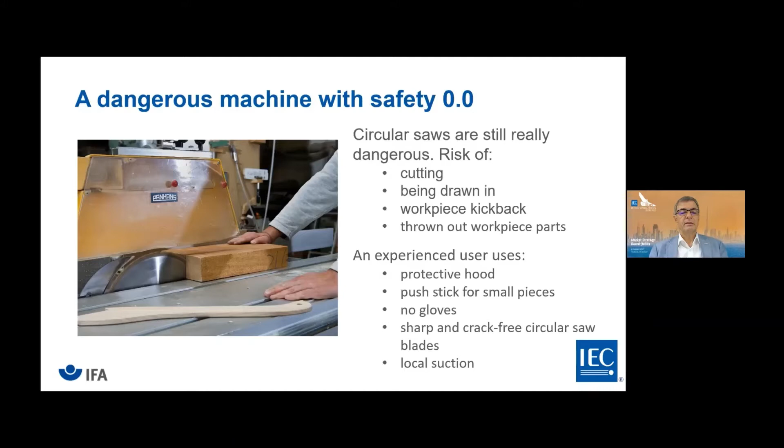And of course you can see in the picture a local suction. But it's clear this is a safety 0.0 situation. You have the hood, but more or less your fingers are very near to the blade, and unfortunately you have accidents with this machine. In the 1990s we had the first discussions with machines, machining centers.

We discussed there also the ISO new modes of operation, manual intervention we called it. The point was, when you open the door there, that is typically a safety 1.0 situation. Normally you work with closed doors, but when you open them for the setting mode, for manual intervention, when you program the system, for example, you have to measure, you have to introduce when the axes are moving.

The question was, is it possible to do it now as a kind of safety 2.0 for these manual intervention modes? So in the standards, we defined a safe stopping process, safe standstill, safe operational stop, safely reduced speed, and safely limited absolute position. So how was it possible to do that?

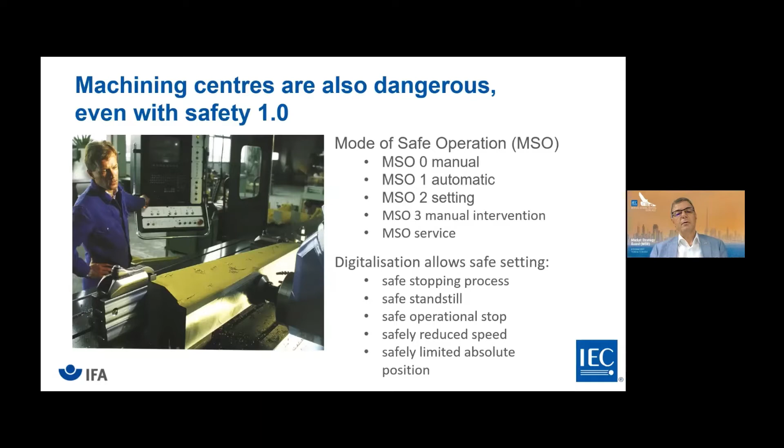Here we have a redundant situation because of functional redundancy. You have a programmable logic controller, and you have a power drive and also a numerical controller. What we did there, we used these different computers in the system for redundancy for safety. So we had the PLC and the numeric controller to have redundancy from the input signals for the doors and some other switches. We had to monitor the velocity using the numeric controller and the power drive, and to stop the system, we also used the numeric controller and the power drive in redundancy. So we have a redundant system.

As you can see here, this was possible because in the 90s we designed these new standards on functional safety. I was for about 10 years the head of the German delegation of the working group which produced the 61508 standard. So functional safety was one of my essential techniques we used in the 90s to make a machine safer.

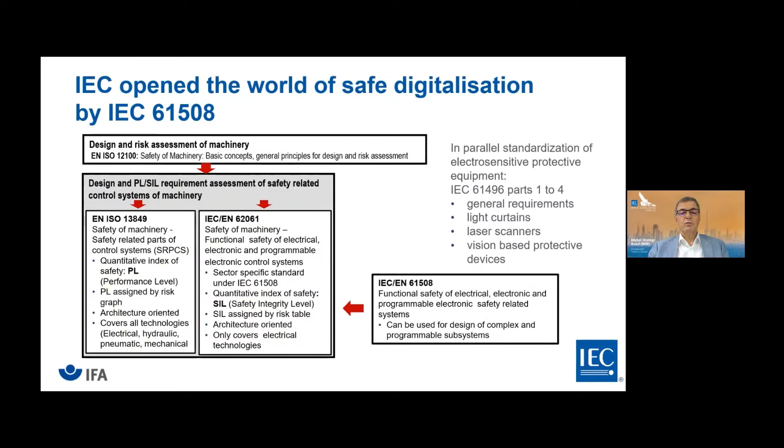So the first thing I want to remember and to tell you, attention: collaborative safety without functional safety is dangerous. In your paper it's very clear you need both, but in some chapters I think it's sometimes a little bit forgotten that functional safety is a precondition for collaborative safety.

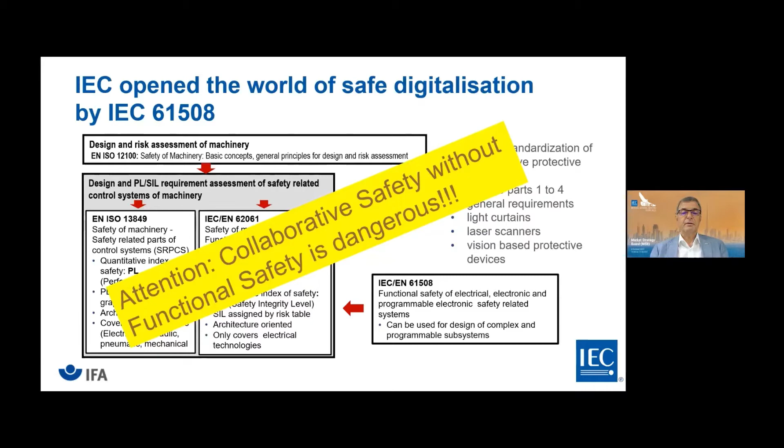When you look at these machines, we had also laser scanners, new machines, these protective devices can only be used together with computers. But these are more complex. When you look at the manuals, for example, for the machining center, the Sinumeric 840D, you have 265 pages to use this. You have a lot of parameters, which you can see here in this picture, that are important for safety. It's a really complex use.

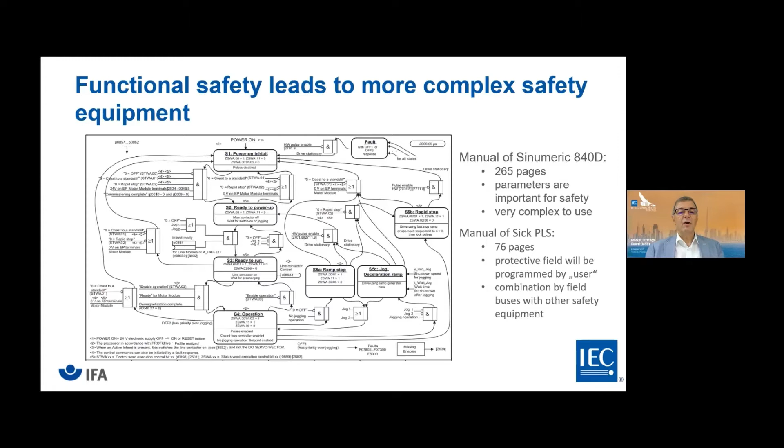It's much easier to use a safety 0.0 or safety 1.0 machine. The same for a laser scanner—you have about 76 pages where everything is defined. You have protective fields you have to program, and all these make things more difficult.

And there's another thing which is coming up now—2010, we had the first discussions on Industry 4.0. When you connect all these machines by the internet, you have a new danger because you can have attacks from outside. What we saw when we went to small companies is that the password of the manufacturer was still not changed after many years, in machines where you need passwords to do the safety algorithms and safety performances.

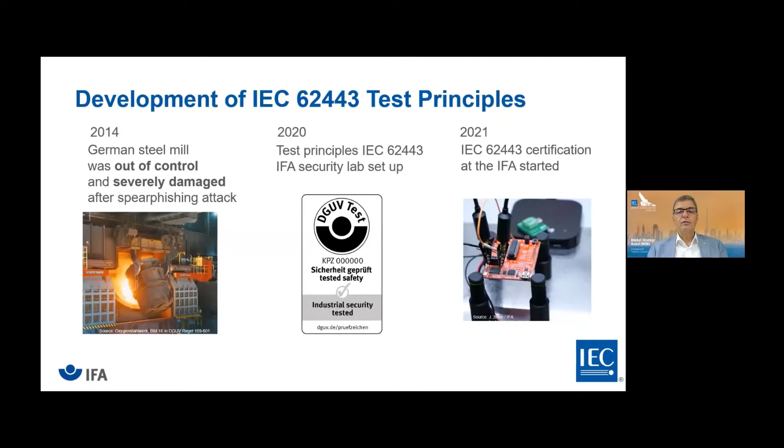So what you can see here, it's not only technology which is necessary, it's also that you need a good safety culture. And this is what we worked on for the last years.

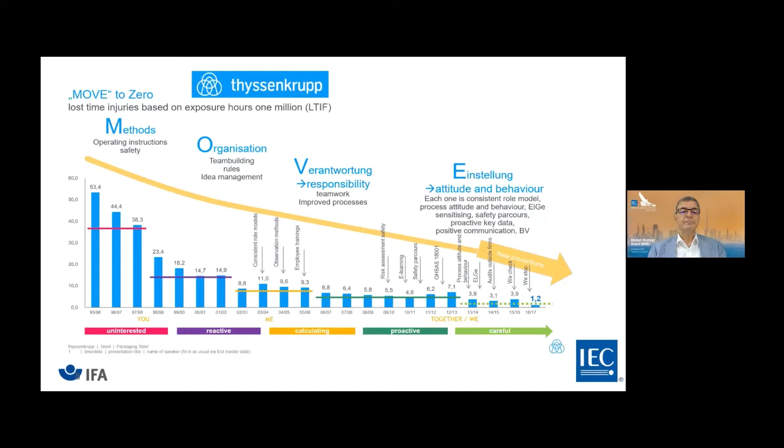So what we see there, it's not only technology which makes things safe, and that is also in your paper, Safety in the Future—you need also a good culture. So the Vision Zero is important. We have these 7 golden rules, and from the 7 golden rules, people developed proactive leading indicators, which are very important to have a safe system, a safe complex system.

So my next message is: attention, collaborative safety needs responsible staff, needs a good safety culture.

Now coming back to safety 2.0, the collaborating robots. It's not so far away from the machining center to the collaborating robots. You have also several axes. The movements are a little bit more difficult than in a machining center, but it's possible to use them in a safe way. That was the first thing—you have functional safety.

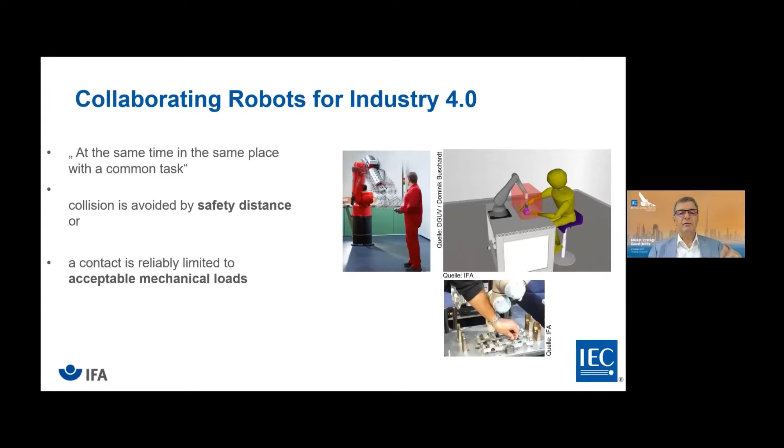What we did at the second step is we needed limit values for the forces when there is a collision, and limit values on the pressures. So that was what we did, also with universities here in Germany, to measure these. We brought it into the ISO. Now it can be used. And we also developed a measurement system to check if these forces and pressures are acceptable.

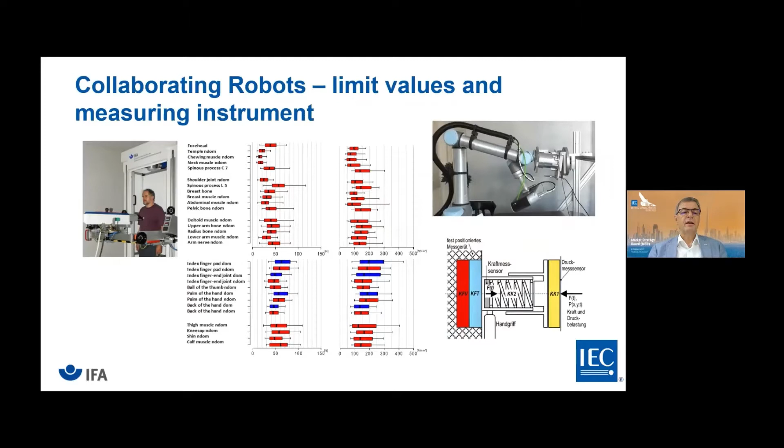And the last step, and then I come back to my beginning, is that with the circular saw, for many years in the university, we developed possibilities.

We began there with machining videos, to see if we can detect people by a normal camera. So we use artificial intelligence. And today, just this year, we got the first application for a circular saw by the biggest German manufacturer.

He is using artificial intelligence to protect people. So how is it possible? It's only possible with trustworthy artificial intelligence. You see there the joint TC where we are working on this topic. I only want to give one example. The degree of transparency and explainability plays a major role there.

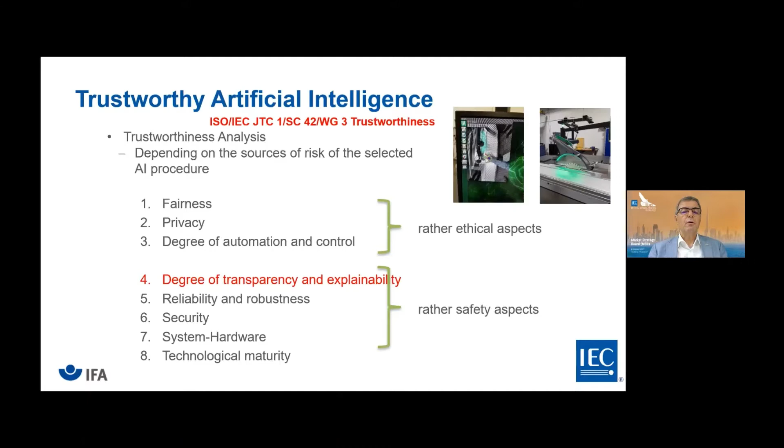And this is my last slide. With this example we have for this manufacturer, we have good transparency because there's an own software architecture and implementation for the detection of hands and fingers near the circular saw, near the plate. And we have control of the entire training process of this artificial intelligence system and the model. So we have a high degree of transparency, but we do not have a high degree of explainability. The reason is that we use a deep neural network, and then it's not so easy to explain in detail what is going on there.

So what we use here are additional measures. We use, for example, gradient-weighted class activation mapping, layer-wise relevance propagation, and local interpretable model agnostic explanations. And with this, we can have better explainability. So step by step, we can also now certify artificial intelligence for safety applications, which is also mentioned in your Safety in the Future paper. Thank you for your attention.

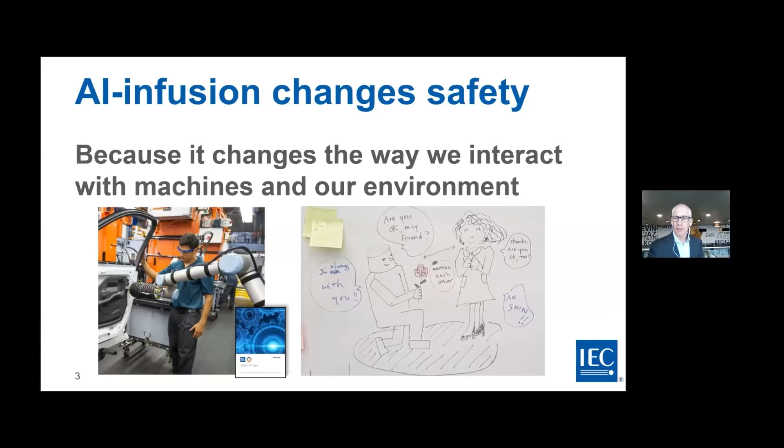Okay, next slide please. There we go. So just to illustrate, many of these things aren't actually that new. Here are two white papers from IEC that actually paved the way. Years ago, we saw from IEC, being electrical engineering oriented, that this stuff was on the horizon. The edge computing white paper of 2017 showed us machines talking to each other. In many ways it's an obvious finding, but it's important because this machine does not just talk to the driver in the car, but to a large system surrounding it, which also makes decisions either with or without the operator. So this conversation you will have with technology at any workplace was already well captured a couple of years ago.

The year after, interestingly, the white paper on AI focused on the force of AI, what it could do for industry, how it would change things. And I think we're living through this massive change in industry and the way we live, which AI supports. Interestingly, in that very same white paper, we have an image about human-robot interaction, directly relevant to this case we're working on. It's about the interaction between the person and worker. The worker wants something, the machine reacts, and together they do a job. So in that sense, the important trends for the safety of the future were already in IEC. They were already being researched, already being studied, and standards were already being made, as well as future visions being given.

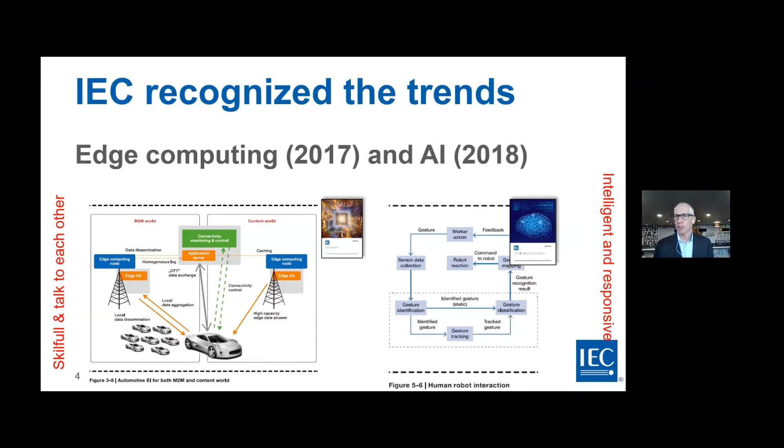And on the safety side, it's the same thing. IEC has always been working on safety, so I have a reference here. From 1926, if I'm correct, TC 16 on basic safety and principles of man-machine interface was at the forefront of electrical engineering at IEC, and I guess all the electrical safety that comes with it. So in many ways, it's also just a cornerstone of how IEC is not only thinking about safety, but also relating to how that would look in the future.

And it's not just the one or two standards that would be there. There's a whole system of standards with horizontal standards collating them, and the ACOS, which Mr. Giles will speak about later, connecting all these things. So it's really an integrative approach to safety from IEC, from the heart of IEC, I'd say. So in many ways, my job, and it sounds a little strange, as the coordinator, was just connecting the dots. The dots were all there. What we really did is connect them in the right way, with the right people, in the right way. And a lot of findings were found.

I think three of them stand out that really make a difference in terms of progressing to the future. The first is that IEC can take a role as a focal point for societal value from this particular point, from safety. There's wide industry support and recognition, but it also gives us a blueprint for safety in the future, where I guess it gets more technical. I just want to say a few words about those things.

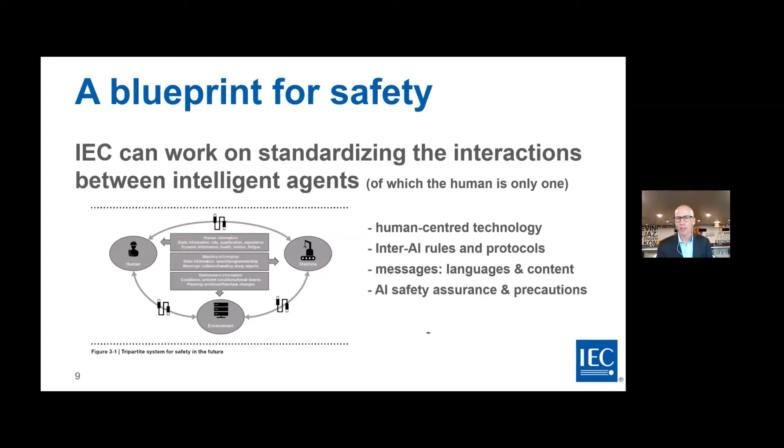So that means work on human-centered technologies, inter-AI rules—so multiple AIs, how do they interact? Dr. Katia does an awful good work there. The protocols that go for that—protocols you could standardize, that's IEC work I guess. Then there's the messages between these agents, that's where standardization is relevant, that's where you get information about safety, about performance, etc. And then, as Dr. Reinert mentioned, the safety assurance, the AI safety assurance. So there's a lot of work to be done in this environment.

So in that sense, just coming to a close here. Why is it so important to me? First of all, we've connected the dots, and I really do think from the perspective we're one of the early ones that actually say this is a bigger system. It's no longer human machine, it's no electricity. It's intelligent agents going to the future, talking to each other and needing to do things together.

I think it reasserts the IEC's vital role for safety with advanced technologies. It was always there, but I think it just reasserts that position and also urges the IEC to think about this future where intelligence becomes important. And also, providing the blueprint for the future that offers foundation for practical technical standards as well as higher level.

Thank you for the opportunity to speak. That's more or less what I said. I feel strongly about it. It's important. Let's go do this. Thank you very much. Thank you very much, Cohen.

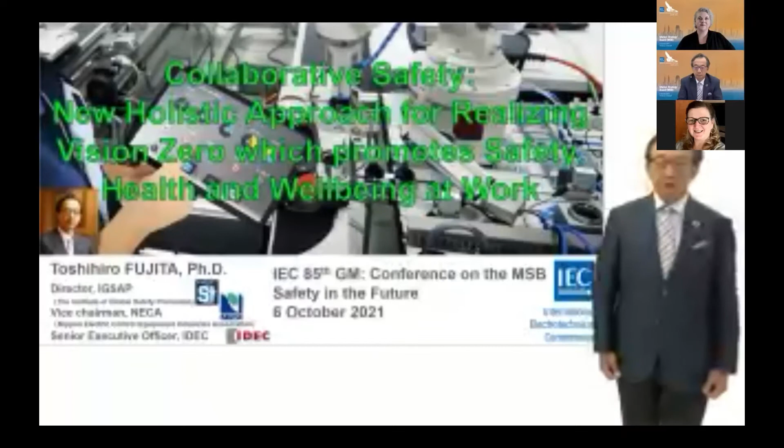It is my great pleasure to talk about collaborative safety, a new holistic approach for realizing Vision Zero, which promotes safety, health, and well-being at work.

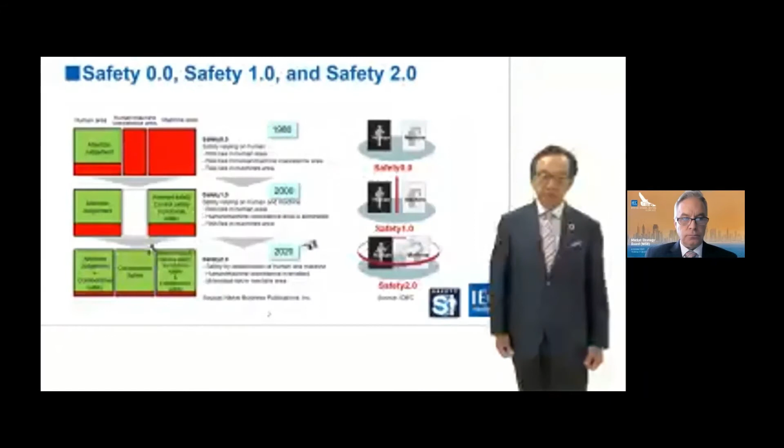This chart shows the evolution of safety, showing that transition occurs every 20 years. In 1980, when a robot was introduced to the manufacturing site, humans needed to be very careful to avoid being hit by a robot, and it was important to pay attention and caution. In the year 2000, various ISO and IEC safety standards were created to protect people from robots. This method can ensure safety, but it is not always productive because the installation of guards is required.

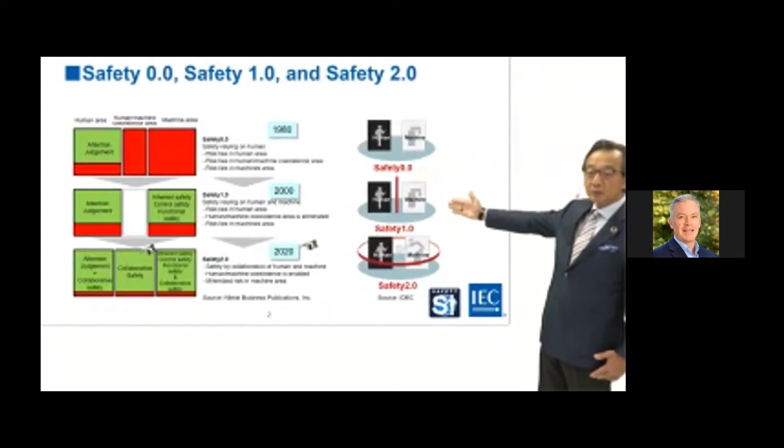Nowadays, people and robots can smoothly work together with the emergence of ICT, and we decided to name it collaborative safety. We call these three generations Safety 0.0, 1.0, and 2.0, and we are very confident that Safety 2.0 will be implemented in many applications all over the world in the very near future because it brings safety, health, and well-being to people.

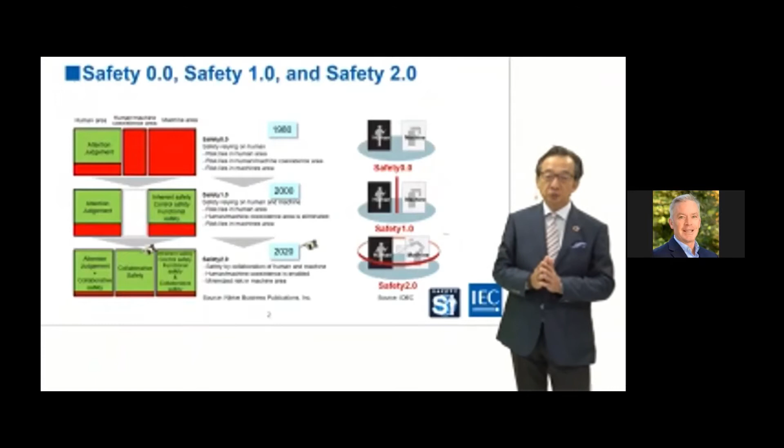This collaborative safety will be applied to a wide range of environments, not only in manufacturing sites, but also in construction, agriculture, and healthcare to upgrade their OSH at work, where human, machine, and the environment will be digitally connected through ICT. Because applications are very wide, some kind of guides or international standards should be created so that everyone can benefit. And we trust collaborative safety will eventually change the OSH environment drastically.

Regarding standardization, we are pleased to know that IEC ACOS, Advisory Committee on Safety, already initiated such works. The chairman of ACOS, Mr. Philippe Jouel, will summarize their activities later.

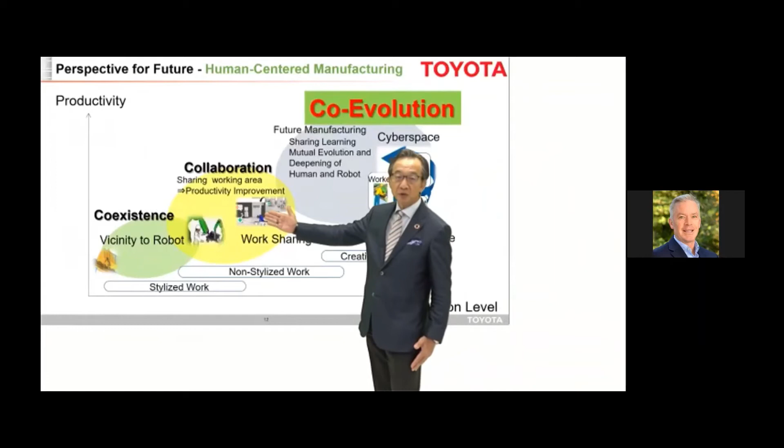This collaboration has just begun to improve productivity, and various trials are underway. Ultimately, Toyota is aiming for co-evolution, as shown here, which will improve well-being for all people.

Toyota's mission is to contribute to the well-being of people, producing happiness for all. So we are excited to see what the new future of safety, health, and well-being will look like through technical innovation. We are at a turning point in terms of safety in the future.

That is why we now plan to hold the Vision Zero Summit Japan 2022, an important event from the perspective of international standardization of the new safety in the future, which is said to be one of the most important themes in the summit. The summit will discuss how technology, humans, and management can reach a global consensus in a holistic way of thinking.

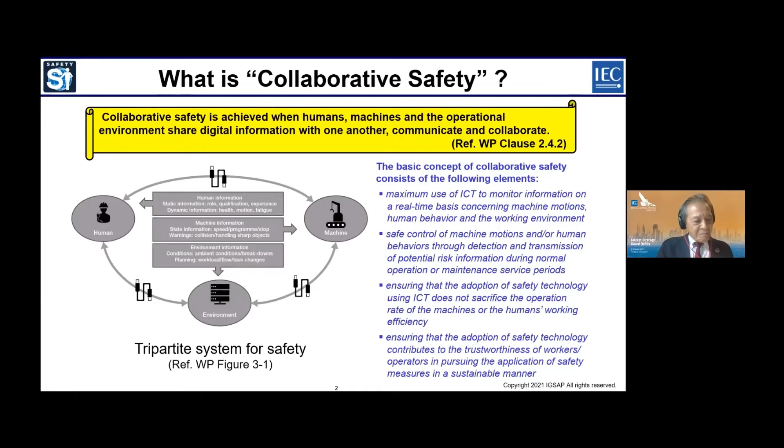In the course of IGSAP discussion, we learned that there was a need for attestation of these new safety measures with a certain standard to demonstrate the company's attitude on safety to interested parties. Since then, we started developing our unique standards and CA programs, and these have been reviewed and improved from time to time based on our practices.

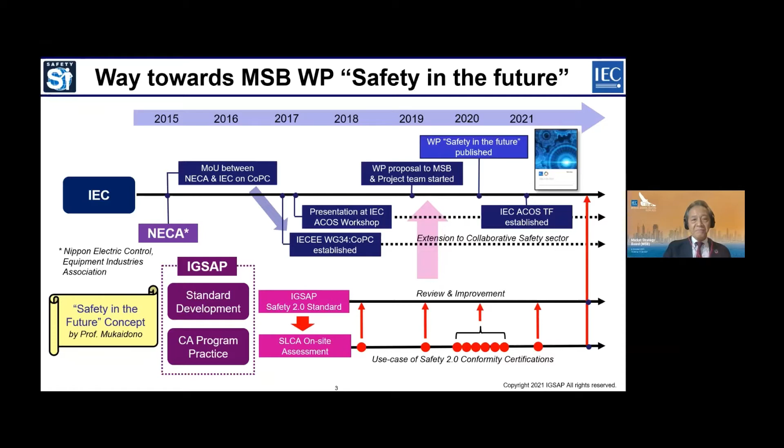For the standard developments, our main focus was put on two major aspects. One is common applicability to different industry sectors. Another is performance-based standards, which can have the flexibility to adopt day-to-day evolving safety technologies.

For the CA program developments, we focused on so-called system-level conformity assessment, which needs an on-site assessment of the system-level safety functionality at the workplaces.

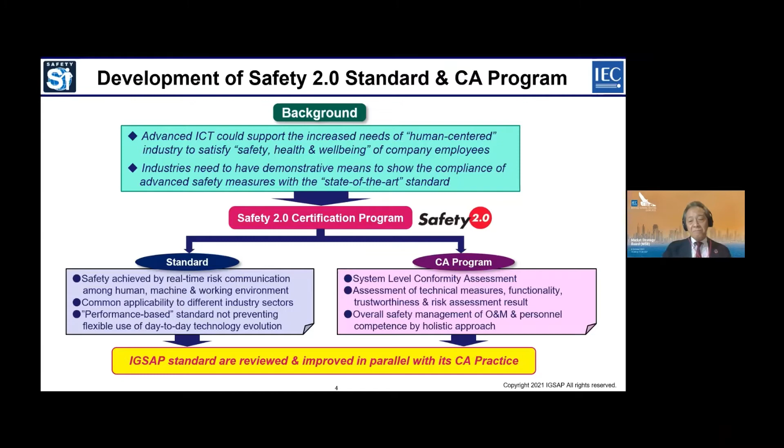The standard and CA program development itself is not our ultimate goal, but the goal should be that they are used as an efficient tool to minimize any hazardous incidents at the workplaces sustainably. For these purposes, we believe that not only the standardization of technical aspects, but also human aspects, such as the operators', workers' qualifications, and their overall management system should be considered when practicing our CA programs.

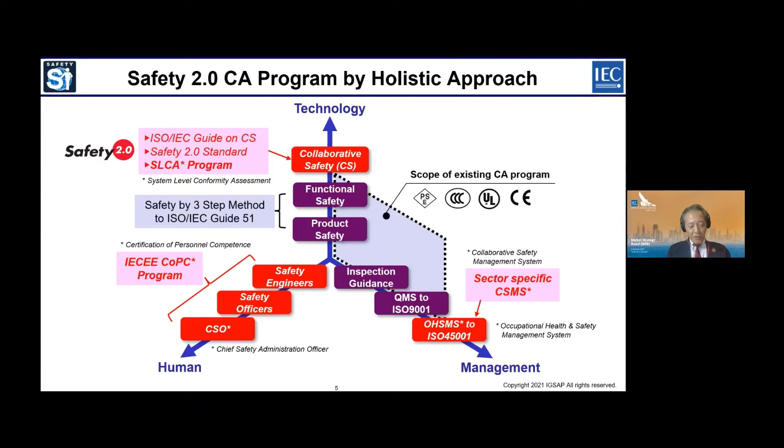This slide shows the so-called holistic approach in the CA program, which can be compared with a conventional product-oriented safety program. There are several challenges, but you see that COPC, Certification of Personnel Competence program, would be one of the essential parts of a system-level conformity assessment program in the coming years. Oh, sorry.

As I mentioned earlier, it is quite essential that the standard and the conformity assessment program should be practical and should meet the industry needs properly. And we started practices of our CA program in several industry sectors.

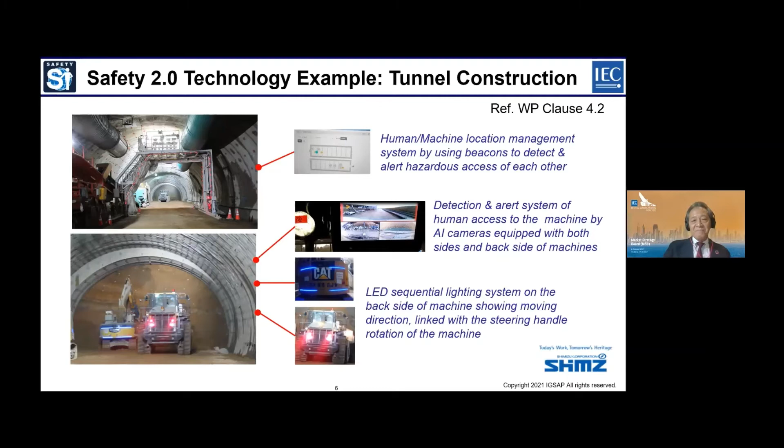The assessment result was reported to the IGSAP decision committee as normal practice for attestation, and it concluded that this site complied with Safety 2.0 objectives, as the functionality and trustworthiness of technical measures, their management, and personnel competence were judged satisfactory without sacrifice of productivity, retaining a safe human-machine coexisting environment in limited spaces. Finally, IGSAP issued the certificate.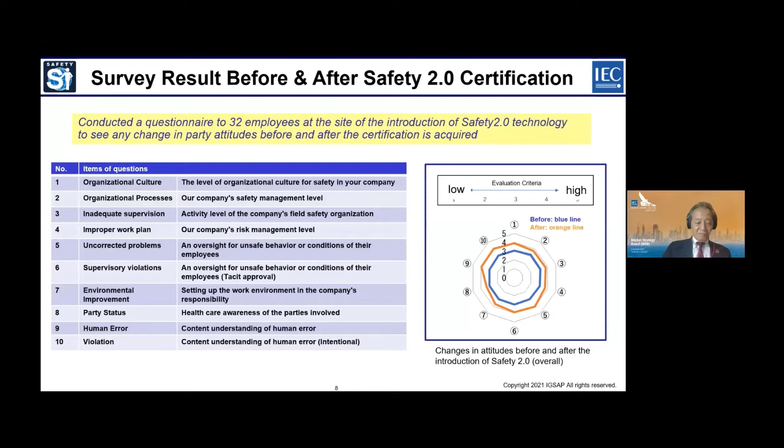There are several lessons learned from our practice in terms of Safety 2.0 standards and its conformity assessment, which I would like to ask you to take into consideration in your IEC standardization work in the future. The first one is performance-based standardization. This has wider applicability among different industry sectors, and it provides freedom and flexibility to employ evolving technology in achieving objectives based on the state-of-the-art principle, with considerably less burden in standard maintenance and revision work.

The second point is, for these purposes, wide stakeholder involvement in standards development is needed, because safety, health, and well-being are ultimate goals for all stakeholders. By setting up common standard objectives to satisfy stakeholders' interests, the value of standards compliance can be recognized by external stakeholders outside the IEC.

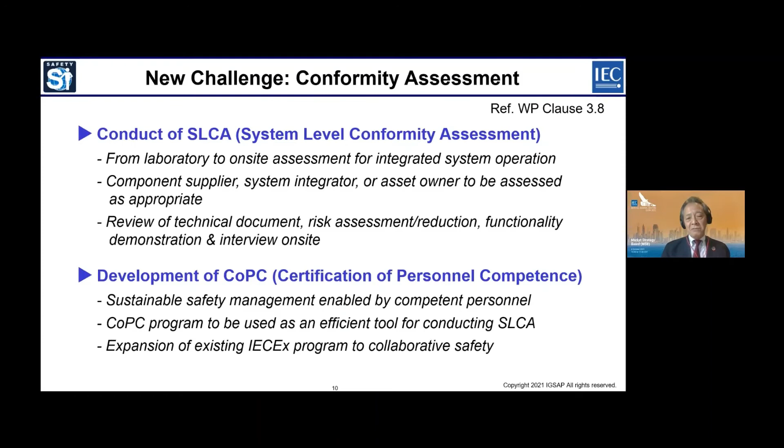Last but not least, I would like to finish my presentation by introducing an upcoming event organized by Japan next May, which was briefly explained by Dr. Fujita, called the Vision Zero Summit Japan. This event is held online and 16 different sessions are planned.

Session one, out of 16 sessions, is the International Standardization for Safety, Health, and Well-being, which I am assigned as session chair. I asked key persons from IEC and ISO for presentations in my session, and they were pleased to accept, presenting on both standards development and conformity assessment sectors.

Especially, I would like to take this opportunity to express my heartfelt thanks to three IEC Vice Presidents: Mr. Ralph Sporer, SMB Chair; Mr. Sean Paulsen, CAB Chair; and Dr. Kazuhiko Tsutsumi, MSB Convener.

As you can see on the speakers list, the six speakers, including myself, were editing members of last year's white paper, Safety in the Future. If you have any interest, I would like to ask you to join this event. I hope that the white paper, Safety in the Future, can more or less contribute to our universal target goals of human safety, health, and well-being. Thank you very much for your attention.

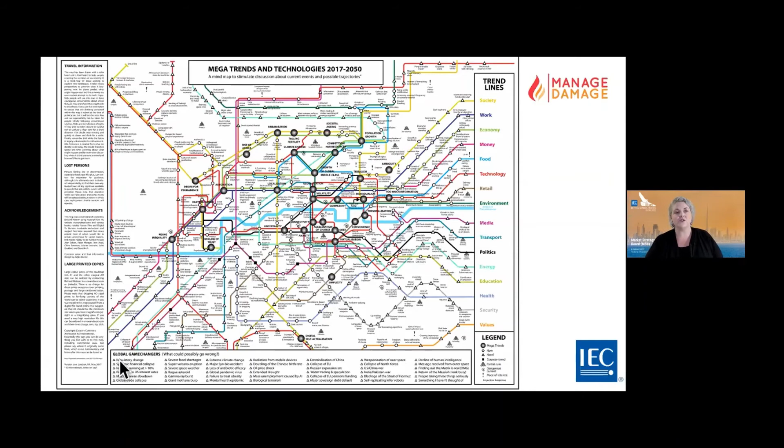The speed of change has only incremented at vast speeds of light and of technology, and the state of change was and is constant. So for us, we are spending a little bit of time together talking about the future, but the future is right now. We have some work to do to install the future controls that we talked about in a forward tense in our Safety in the Future paper. But it's now a past tense for most of the work that we do because it's now.

Interestingly, COVID really brought safety to the fore. Safety became the new big thing. And for a culture to have its best strength, we have to engage with the work of all the players in the marketplace: investors, shareholders, organizations, workers, customers, engineers, designers. Together, we all have a part to play, and we all have the effects from safe products, services, activities, and processes that we design.

So during the pandemic, people started to demand safety trust. No longer are we at the self-actualization phase. We are core basic, down to food, water, shelter, and safety. People needed to be assured that they would indeed be safe if they bought your products or used the services that we designed. And our workers started to deeply care about their own health and safety, and the health of their loved ones, all at the same time.

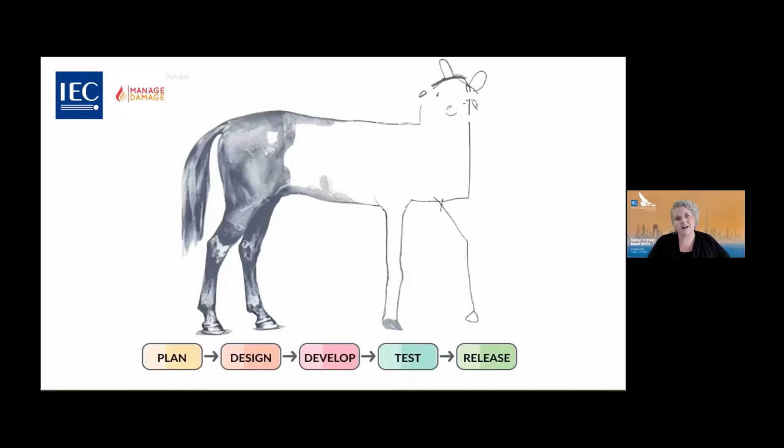The issue that we face here, and the fact that we talk to IEC engineers, is it's you. It's the people sitting in front of us today who actually have the power to be able to design, test, release, and develop products that are safe. It is in your hands.

The kind of products that we have been designing in the past, letting go into the marketplace and having our customers test for us, this kind of design is not going to float in the future, especially if it's not safe. We're seeing product safety regulators, the people of the public, and investors deeply interested in what we are delivering.

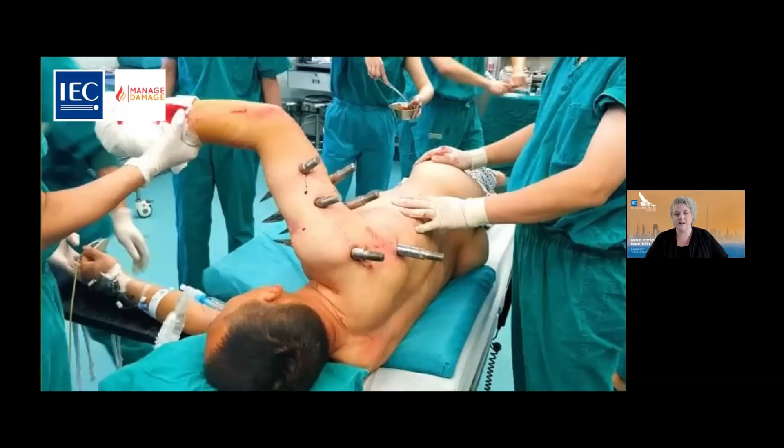No longer is it remotely acceptable for a factory robot to do things like this. And even just last month, in August, the United Nations in Geneva had their first official diplomatic meeting on lethal autonomous weapon systems, or killer robots. In nearly a year, they meet again, and we're talking about robot treaties. So again, we go to the design and the safety and the decision-making that these robots can make in their acts of service designed by us.

Here we are, we have to work in harmony because the robots are here, we are here, and we are the designers of the robots. So if we work together, the best outcomes from robotics can be improved safety, improved health, and reduced injuries and incidents. And it's the minds that we have sitting right with us now, from your living rooms, from your offices, from your telephones at the airport. You are the people who have the power to make this change. And we need to work out those details.

And of course, it's for us before the laws come into play. So of course you spoke about the laws if they've changed in Japan. In Australia, in 2018, I wrote a book called Risk Dollarization, and we identified the challenges in the AI and robotics elements of law, because they were not nominated throughout our legislation. Today doesn't need the law to change. It requires us to make those safe design decisions to ensure that change.

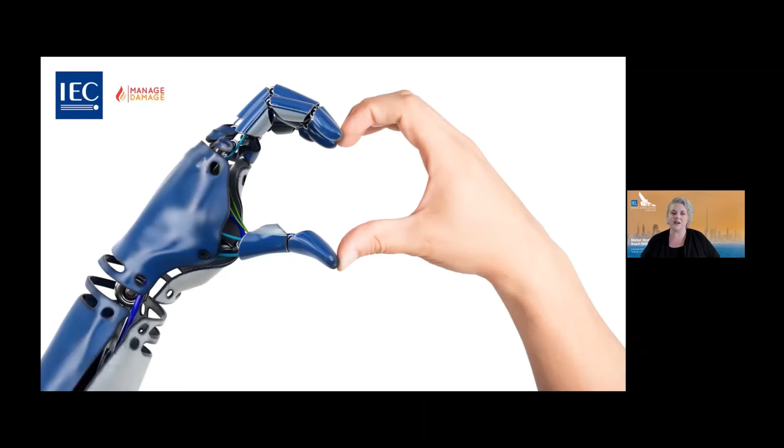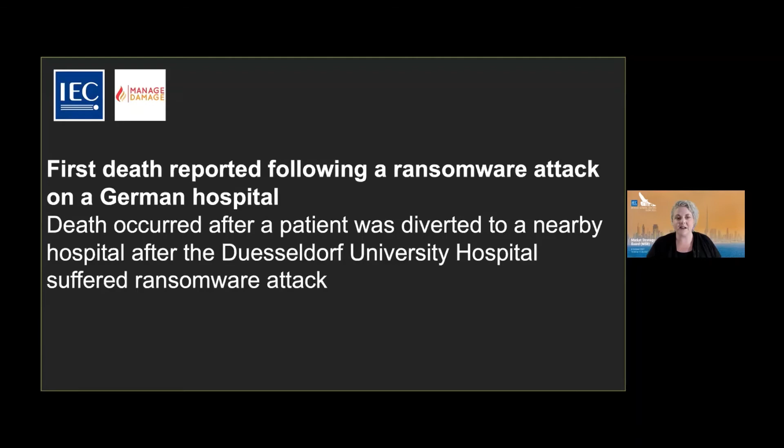Cyber attacks are normal now, every day. Daily, people's identities, money, and aspects are stolen on a day-to-day basis. Just this year, we had the first death reported following a ransomware attack in a German hospital, in September. So when we've never been more connected, we're also never been at more risk, which means that it's up to us to ensure that when we place our designs and systems, that we are thinking about it.

It's time, all over the world, in every clock, in every place that we have, to start helping to move in the right direction. We at IEC have always stood for making the world a safer place. We just need to design the new and the next wave most carefully, as it has more impacts, as the technical steps between humans and robotics and AI and automation are much more complex than they ever have before.

Finally, because of COVID, all around the world, being a good corporate citizen, in the sense of making sure that you provide a safe place to work, a safe place to visit, safe products or services, started to deeply matter to organizations and nations all over the world. And it started to fit into everybody's strategy to make their operations survive and even thrive in the pandemic environment.

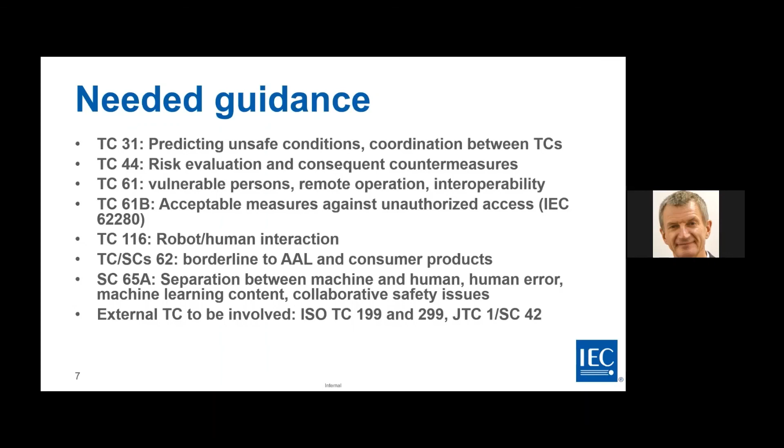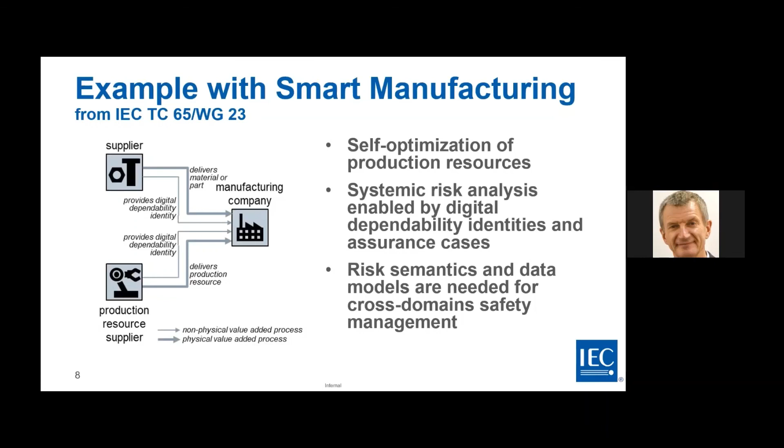Today we have collected several contributions, and the task force, which is in progress, is continuing to develop the identification of the gaps, and also to prepare recommendations to SMB. Most probably the recommendation will be given next year at the next SMB meeting, beginning of next year.

We have a really specific focus on the functional safety aspects related to autonomous functions, so TC65 is clearly involved there. And also trustworthiness, which is a concept well developed by SC42.

We are also using the support prepared by Japan about many use cases which have been developed in Japan, which are in the scope of ISO, but we are trying to identify what should be the contribution of IEC in those ISO use cases.

We are still working on the definition of collaborative safety in terms of technical definition, and this is not yet mature enough today, unfortunately, but we are spending a lot of effort to clarify that and to make it understandable by the technical committee, and this is our task in IEC ACOS.